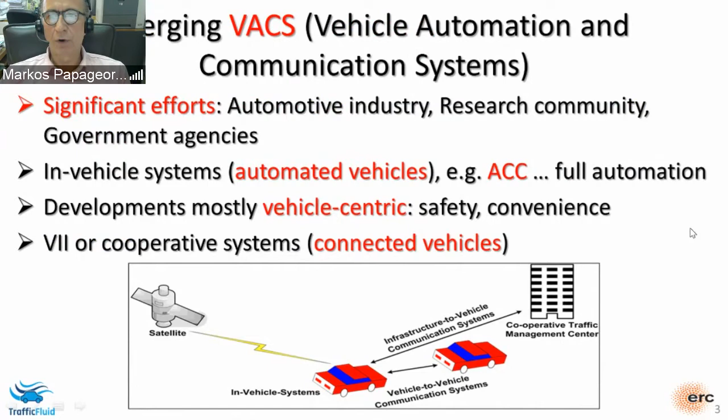And a step further is, of course, when vehicles can talk to each other and to the infrastructure, then we talk about connected vehicles, and this is important in order to facilitate a better behavior of vehicles, even for the traffic flow. Given these developments, it is very natural and necessary to ask what would be the implications for the traffic flow, which, as we said, is not the first concern for these developments. And even more importantly, how can we exploit such systems for better traffic flow efficiency? This is something that we considered within the first ERC Advanced Grant that we had, which was running from 2013 to 2018.

There is a website which is still active, and you can find more information about these issues there.

When we started in 2013 with TRAMAN21, there were very few groups addressing similar questions. Meanwhile, research in our domain is dominated by good works that look at issues of implications and exploitation of vehicle automation for traffic flow efficiency, addressing mixed traffic, since there will be a transient period before we possibly reach high or full automation of vehicles, with different penetration rates.

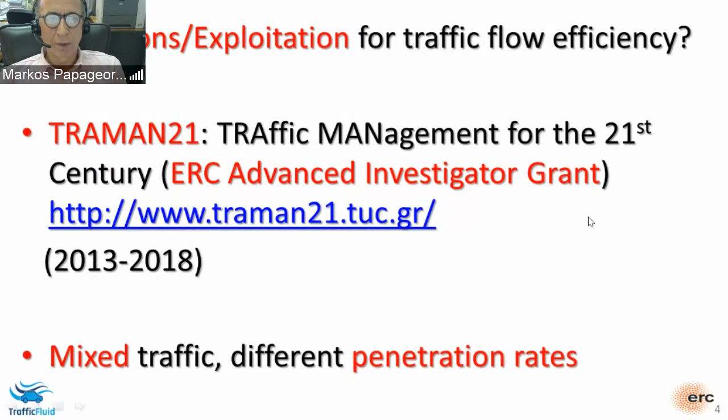Without further ado, I will enter the domain of TrafficFluid, which aims at launching and investigating the properties of a new paradigm for connected automated vehicle traffic. This means we are now looking not at the next few years, not at the transient period, but at the later period when most vehicles are highly automated, with a high level of automation. So the new paradigm we try to investigate is for that period.

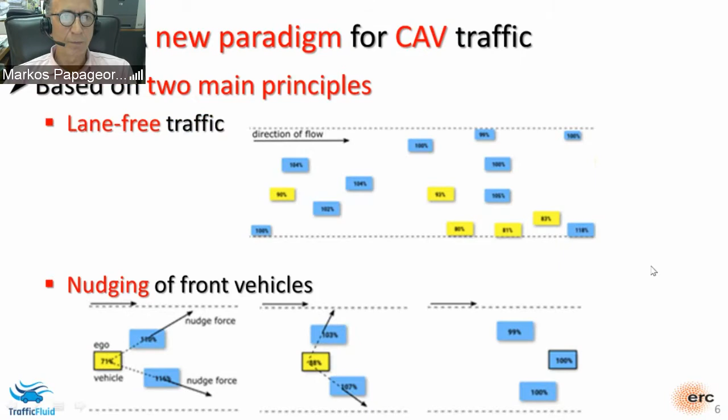So we'll first discuss those two principles in a bit more detail, first in separation and then in combination. Let's start with lane-free traffic.

I was surprised myself to find out that what we are accustomed to seeing on arterials, highways, and even urban roads—unidirectional, parallel lanes—was not there before the 1950s. There were no lanes, no parallel lanes on the road. And if you think about it, it's understandable why they were introduced.

They were introduced because they render manual driving easier. If you are driving on a lane, all you need to do as a human driver is monitor the vehicle in front of you—don't need to look left, right, or behind, just in front, and try to keep a safe distance to the front car. This is, of course, very easy and therefore very safe.

Of course, the counterpart is that you cannot stay all your life on a lane. You may need to change lanes from time to time for various reasons, and this is quite a risky maneuver. There are statistics saying that 10% of all accidents are due to lane change.

Now, the introduction of lanes comes at a certain cost. One is that lane changing leads to accidents, but there are other costs as well. Consider that highway lanes are about 3.5 meters wide, while average car width is 1.8 meters, truck width perhaps 2.5 meters. Considering this, and the fact that vehicles usually do not assign themselves optimally among lanes, we end up with a lateral occupancy of around 50%, which means accordingly reduced capacity.

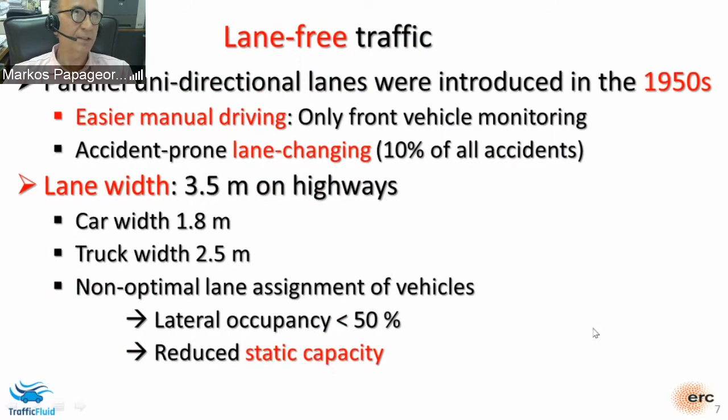But there are also losses that could be characterized as dynamic capacity losses. What is the reason for those losses? Well, we know that when a vehicle changes lane, it occupies simultaneously space on both the origin lane and the target lane. We also know that if we have traffic conditions close to critical, then just a lane change may trigger congestion, which otherwise might not appear at all or might appear later.

And last but not least, the accidents we mentioned earlier, of course, cause non-recurrent congestion, which reduces the efficiency. So, sorry. If we summarize, lanes were valuable to introduce because, of course, traffic is then safer under human driving, but it has also a cost that we mentioned.

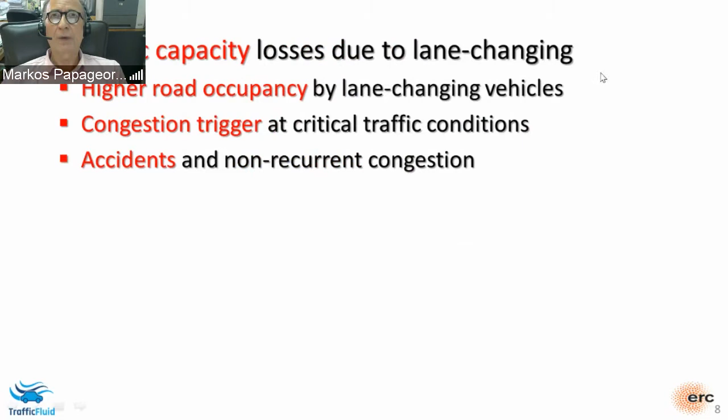So the question now is, if we go into an era where vehicles are automatic, should we stick to lane-based traffic? Should we mimic human driving? And the answer that we give, or try to investigate what happens if, is no. We don't need to stick to that. Why? Well, because we don't have human drivers, we have automated driving, we have sensing on a 360 degrees basis all around, simultaneously, reliably, and fast. So no problem with sensors.

And if we consider communications, then we can even enlarge this area of monitoring. And on the top of that, we have a closed loop system for car driving, which is very fast and efficient because it is computer based. So all in all, we have a system that is much superior to human drivers in terms of senses, in terms of real-time information, and in terms of decision making. Superior because it is reliable, it is fast, and can do the job efficiently.

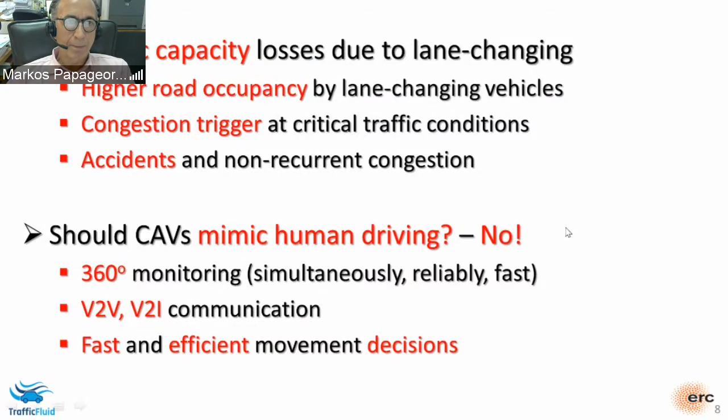And therefore, we believe in this project that if CAV would be floating, not following lanes and lane change, floating freely on a lane-free, two-dimensional road surface, this would, of course, render lane changing obsolete, because lane changing is something bad, as we have seen. So that would be obsolete, no lanes, no lane changing. But on the top of that, we think, and we are working to demonstrate that such CAV floating would be easier, would be more efficient, and would be safer.

Easier because an algorithm that drives the vehicle smoothly on the two-dimensional road surface is easier in absence of the discontinuous lateral displacements due to lane change. You can float in a smooth way. More efficient because we increase static capacity, because we mitigate dynamic capacity losses, and also for an additional reason: when you have no lanes, then any widening of the road, even if it is incremental, leads to a corresponding increase of capacity.

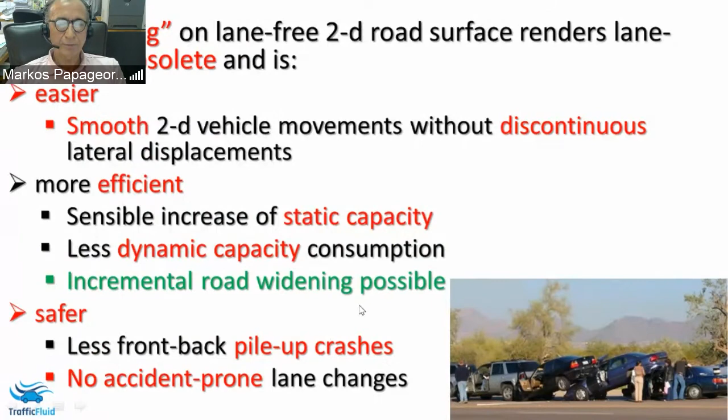Now, what about vehicle nudging? You all know that vehicular traffic flow is very similar to water flow. In fact, the celebrated LWR paper in the 50s had two parts, part 1 and part 2. Part 1 was about water flow, part 2 was about traffic flow, based on exactly the same mathematical principles. So we have kinematic waves, we have shock waves, we have the flow-density characteristic. They are not the same, of course, in shape, but the principles are the same.

However, there is a big difference. And this is because conventional traffic is anisotropic. And this feature stems from the fact that drivers are influenced only by front vehicles. You drive according to your front vehicle. You're not influenced normally by what the vehicle behind you is doing. And this is leading to an anisotropic behavior of the traffic flow at the macroscopic level.

And this is, of course, not the case with water particles, because water particles are pushing front particles. And this increases the capacity of water. So with water, if you have higher queuing, if you have congestion, you have higher flow. So the fact that vehicles behind may influence vehicles in front has implications for the emerging macroscopic flow behavior. And in particular, there are good indications that it improves capacity or flow at different densities and stability of the emerging traffic flow. Less stop and go.

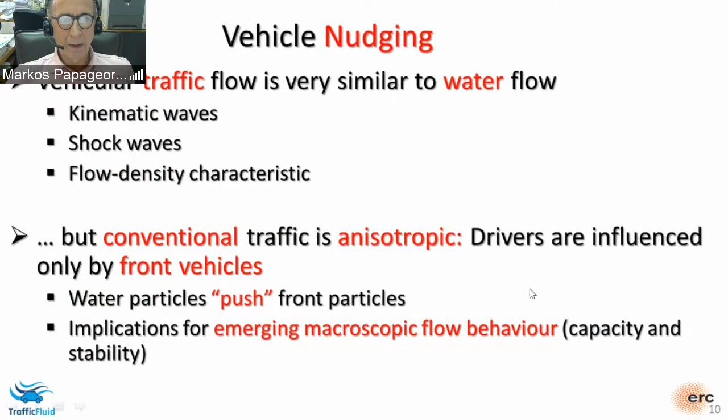So, in the case of CAV traffic, if we want, we can have vehicles being influenced by vehicles behind them. And this is, in fact, what nudging is. Vehicles behind influence the vehicles in front. Of course, this nudging should have limits. For example, we don't want to frighten passengers in the front cars, and also we don't want to jeopardize safety.

But there is absolutely no reason why we should ban this behavior and go with a strict anisotropy restriction. Because such a restriction seems to be a fossil from the era of manual driving. In manual driving, there is no other way, but in automated driving, we can do different things if it is beneficial. So why should we say, no, no, no, we want to go like human drivers?

And so with these two principles, we can talk about traffic as an artificial fluid in the following sense. What are we doing in our committee, TFTC committee, usually? What is our business? Our business is to model traffic flow, microscopically, macroscopically, model a physical phenomenon. But think about it, in the era of automated vehicles moving according to our control strategy, we can design the traffic flow characteristics that emerge from this vehicle movement. And we can design it in an optimal way.

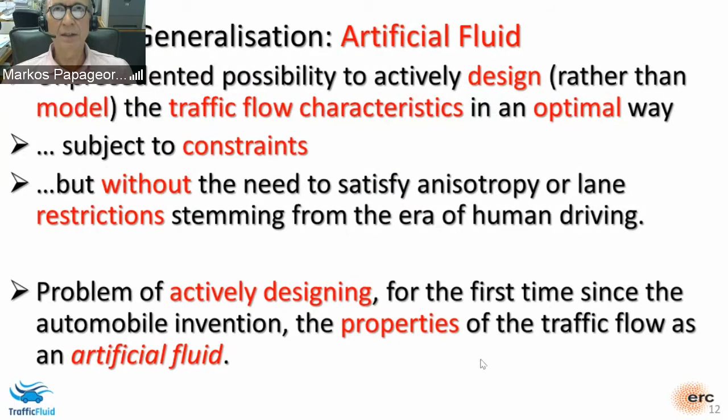Of course, subject to constraints, but without the need to satisfy constraints that appear arbitrary, like anisotropy or lane restrictions, which stem from the era of human driving. So we have the problem of actively designing, for the first time since the automobile invention, the properties of the traffic flow. And so in that sense, we can talk about an artificial fluid, because if we design the properties of the fluid within limits and restrictions, but we design it, then it is an artificial fluid.

What are the research needs? Within our project, we have 3 axes of developments, but there may be more, and there may be more even within each axis than we have thought about. So the most important one is the first one. We need to design strategies for vehicles moving on a lane-free road with the possibility of nudging. And as I said earlier, it may be easier than with lane-based traffic, mainly because of the lane changing, but it is not an easy thing.

We are working in parallel on 4 different methodological approaches for this endeavor. And there are many interesting questions arising regarding the architecture, regarding the kind of infrastructure, regarding special vehicles, and so on. So this is the first axis of work.

The second is the emerging macroscopic model. Here I do talk about a model, because on the micro level, there is no model. There is a movement strategy, an active movement, a control strategy for the vehicle. But the emerging behavior is a model. What is the implication of this or that movement strategy on the traffic flow behavior and characteristics? And of course, we need here an interplay. We need to go back and forth between vehicle movement strategy and emerging, resulting macroscopic behavior to see what is beneficial at the level of traffic flow.

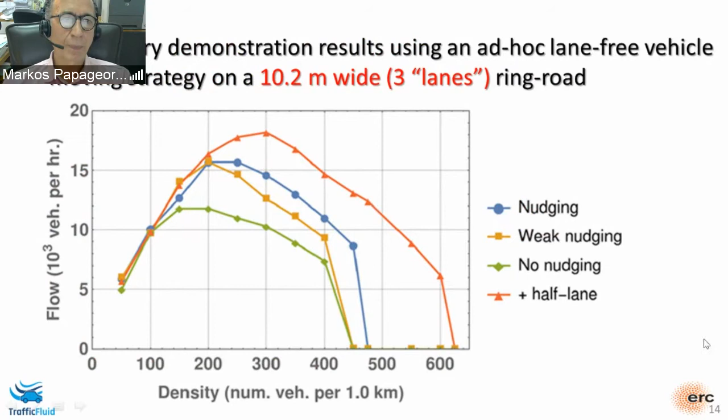And what is the red curve? Well, the red curve is a fundamental diagram resulting if you increase the width of the ring road by 1.7 meters, which is, let's say, half a lane. Of course, in lane-based traffic, if you would increase by half a lane, you wouldn't reach any higher flow. But in lane-free traffic, by doing that at the same density, you increase spaces, you increase speed, and so you increase flow, particularly for overcritical conditions. So we see that an incremental half-lane increase of width leads to a corresponding increase of capacity and of flows for the congested area.

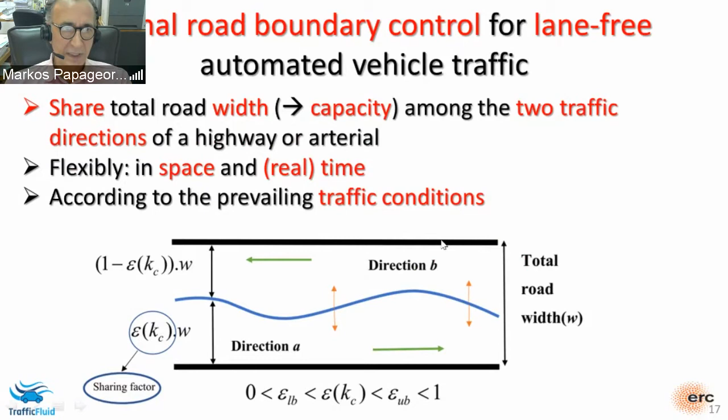So we define a factor epsilon, we call it the sharing factor, which changes over time and over space. This sharing factor is between 0 and 1, or between other positive bounds, because we don't want to utterly close any of the two directions. And this sharing factor is a portion of the width, namely the portion that is assigned to direction A, and the complement is assigned to direction B. And this has a corresponding impact on flows and capacity.

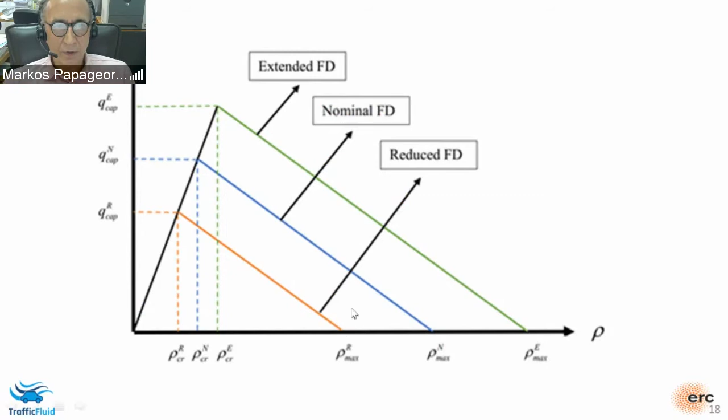Is this new? Is this idea new? No. I mean, at least the basics of the idea is not new. We all know that even in lane-based traffic, we have what we call reversal lane control or tidal flow in Europe. And this is present even with conventional vehicle traffic, but in the vast majority of cases, this is for steady operation, not real-time operation.

And for long stretches of a highway or an arterial, not different locations. So for holiday traffic, for evacuation situations, for work zones, we know that it is a pretty typical operation, but without changes in space and time. There are very few, really extremely few systems that operate indeed in real time. But of course, this has an overhead, it has a cost, because usually you may wish to have the shared lane emptied in one direction before you can open it in the other direction, and this has a strong overhead, which can be still beneficial, but it's a different thing.

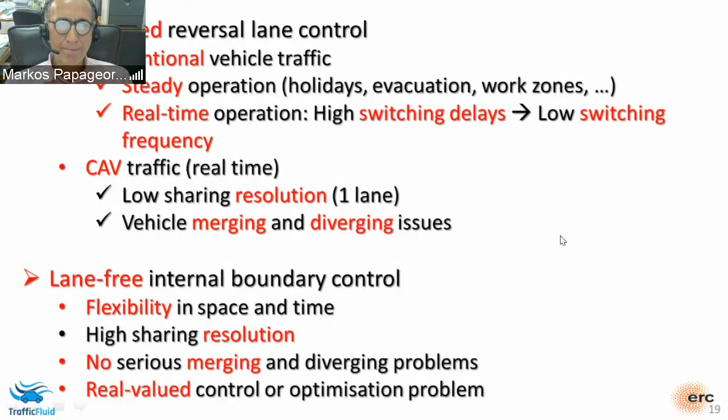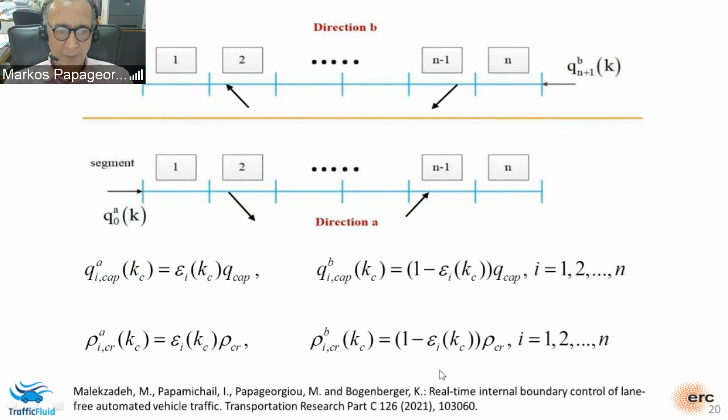And this sharing factor, which is a sharing factor of width, is at the same time a sharing factor of the total capacity, total meaning cross-road. So the direction A capacity is the sharing factor times the total capacity, and the complement for direction B, and by the way, same for densities, critical density. And this approach has been presented in a recently published paper in Transportation Research Part C.

So, to test the idea, we don't go immediately to microscopic simulation, we use macroscopic simulation, specifically the cell transmission model, for controller design and simulation testing. And we have two control approaches. One is based on a convex quadratic programming optimization formulation. And the second is based on reactive feedback control using a linear quadratic regulator.

And the performance criterion is to minimize the total time spent by vehicles in both directions. So we want to maximize the efficiency of the whole road. But we also would like to have smooth space-time behavior of sharing factors. And we also would like to balance capacity reserves, if there are capacity reserves, between the two traffic directions.

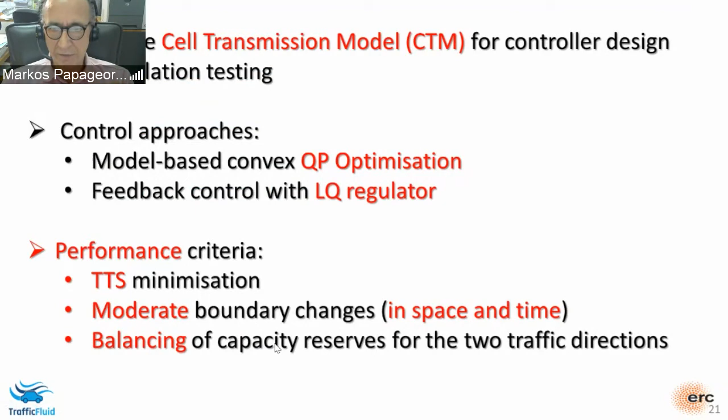So here is a demonstration example. Assume that this stretch of road is 3 kilometers, and you have 6 sections of 500 meters each, and you have off-ramps, on-ramps, and you have a total capacity of 12,000 vehicles per hour, and a control time step of 1 minute. So every 1 minute you can decide on how to move the internal boundary of every section.

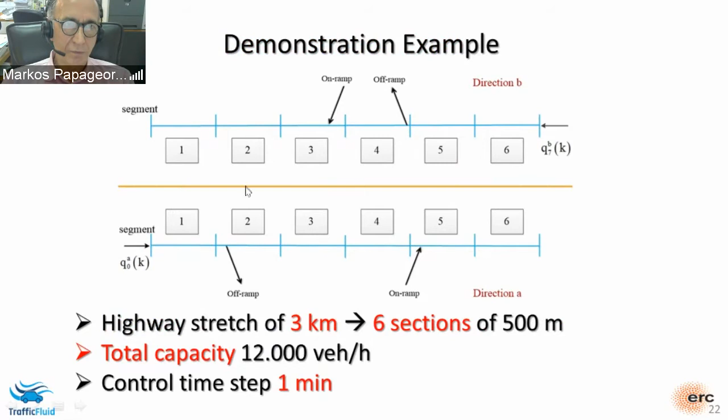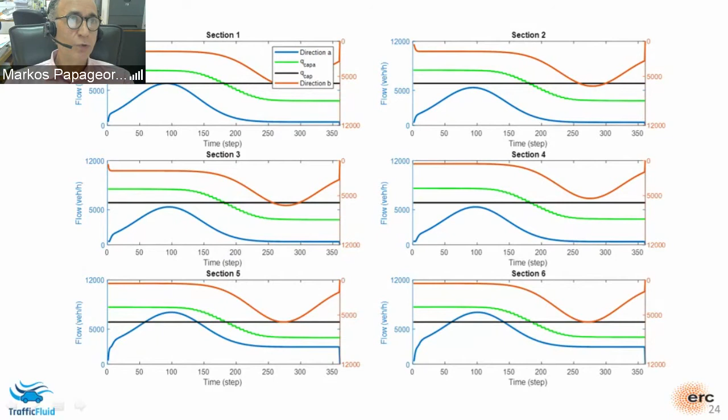And this is a very interesting slide. Looks complicated, but I will try to explain, to understand what the method can or cannot do. So what do we see? We see 6 diagrams for the 6 sections, 1, 2, 3, 4, 5, 6. And in every diagram, we have the 1 hour of simulation, so here we have time, and the y-axis is flow, from 0 to 12,000. 12,000, I recall, is the capacity of the total road.

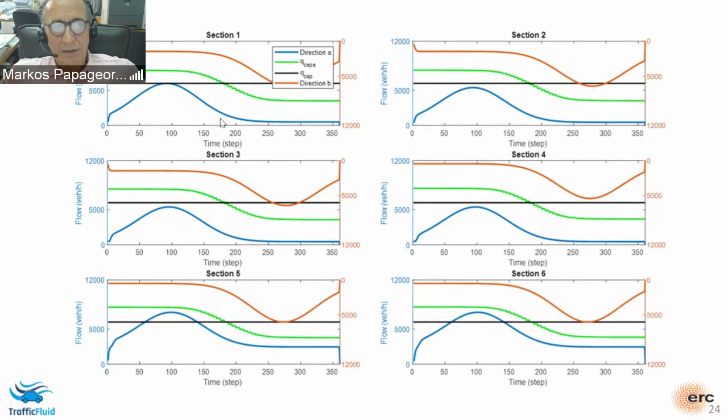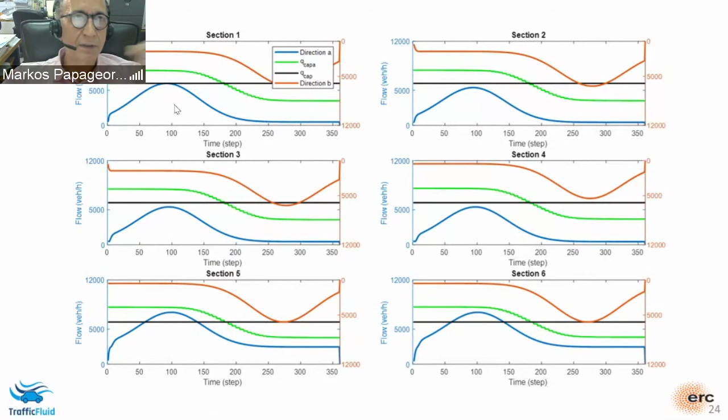So what is the blue curve? It's a flow in direction A, and it is what we call the projected demand. It is the flow that you would see over time in direction A if there would be no capacity constraints. If everybody would drive at free speed, then according to the demand scenario, this is what you would see in section 1, 2, 3, 4, etc.

And the red curve here is the same thing for direction B, but upside down. So 0 for the red curve is here, and 12,000 is here. And other than that, the time is the same. This is the projected demand for direction B. And these peaks here are due to the peaks that we had in the demand, right?

Okay, now, the black line is at 6,000 vehicles per hour. So if you would have a fixed boundary, that would be the capacity for direction A and for direction B. And this means that if we look here at section 5, where the on-ramp is located in direction A, you see that the projected demand curve crosses the fixed capacity. So we expect at this point in time in section 5 to see a congestion if we simulate things, because the total demand is higher than the capacity.

And by the same token, we would expect in section 3 later on to see a congestion in direction B, because the projected demand in this section, which includes the on-ramp, crosses the fixed boundary. But at the same time, we see something very interesting. We see that there is a huge space between the red and the blue curves in every section. Every section, there is a big space.

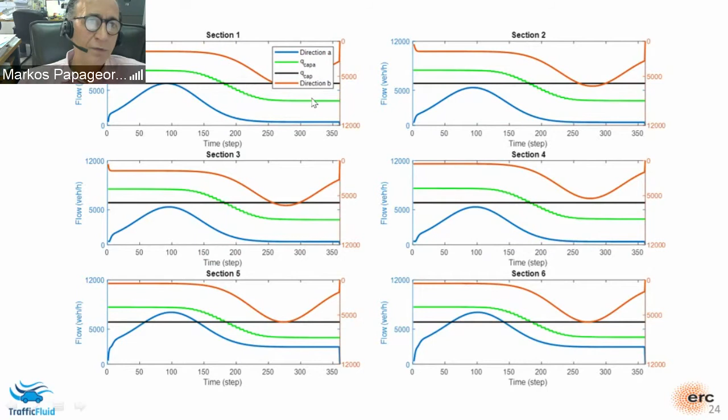So if we would be able to move the internal boundary, like in this green curve, we would never have any crossing. So we would have assigned more capacity to direction A when it has its peak, and then switch to the other direction when direction B has its peak. And so we would have no congestion at all, because there is no crossing of projected demands and capacity. And this is exactly what internal boundary control is trying to do.

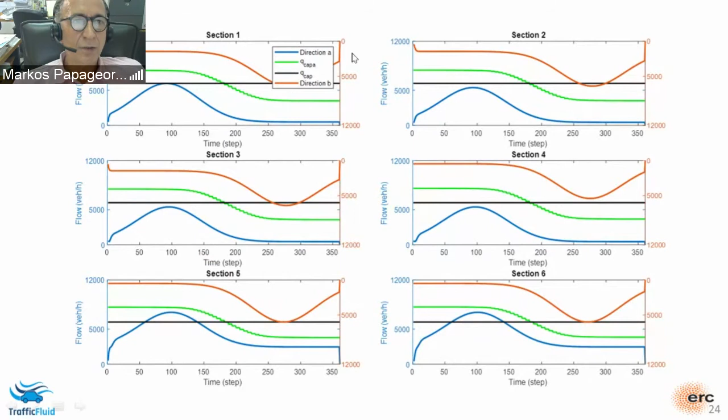So here are the simulation results for the no control case. 1 hour of time, space, 6 sections, flow from 1 to 6 for direction A, and for direction B, it goes the other way around. And what do we see here? Is it the density? No, it's not the density. It is the relative density. What is the relative density?

Well, looking at density like in conventional traffic makes sense if the critical density is constant. Then we can set the colors according to the critical density, and if it is higher, we can have it red for congestion and so on. But here, the critical density is changing over time, not in the no control case here, but in the next diagram where we will have control. So the point is not how much is the density, vehicles per kilometer. The point is how much is the relative density compared to the critical density.

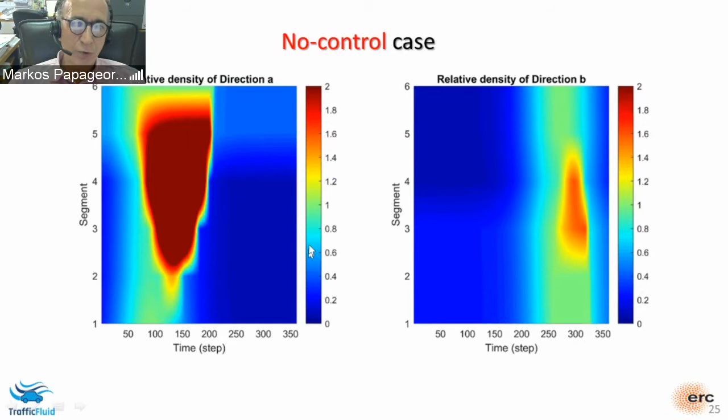So a relative density of 1 and below means no congestion. Above 1, there is congestion. So we see here congestion in section 5, as we had predicted, and also congestion here in section 3, direction B, as we had predicted. And again, as we had predicted, in the control case, no congestion. All values are clearly lower than 1, because we have placed the boundary such that there is no crossing, no exceeding of capacity.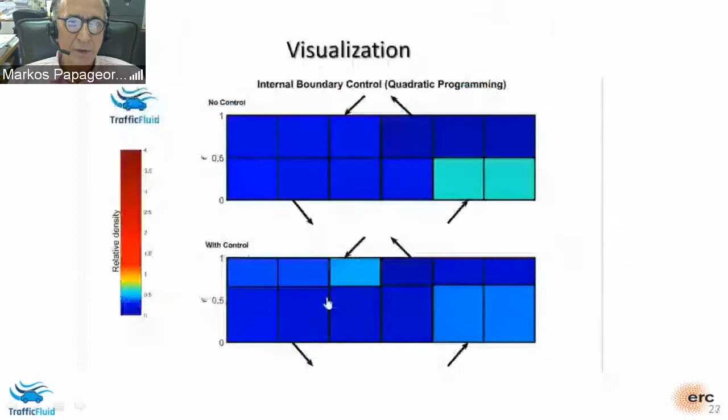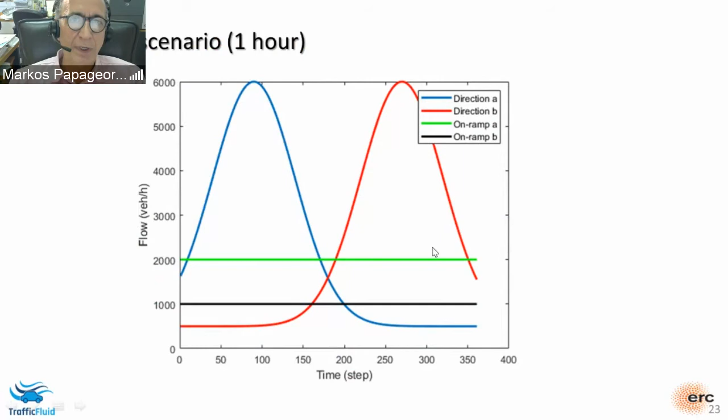Now I ask the question: is it always possible to avoid congestion? And the answer is, of course, no. This is a different scenario here, where we have moved the two peaks closer to each other.

Everything is the same, but we moved the two peaks closer so that we have a stronger overlapping of the peak period. In this case, if we look at the curves, we see in some sections a big space between the two demands. But look at section 5 - the two projected demands are intersecting, are crossing. So there is no way to find a location for the internal boundary to avoid congestion. In this case, congestion is unavoidable even with internal boundary. But of course, it would be very strongly mitigated.

And what is also interesting, this is now a bottleneck. Section 5 is a bottleneck because the total capacity is not sufficient to accommodate the total demand. But in contrast to conventional traffic, where a bottleneck is independent - it can be in A direction, it can be in B direction, there is nothing in common - the bottlenecks are independent of the other direction. In this case, the bottleneck, if there is one, it is a bottleneck for both directions. It is not just for one direction, because otherwise you could increase the capacity and avoid it. When there is a bottleneck like here, it's for both.

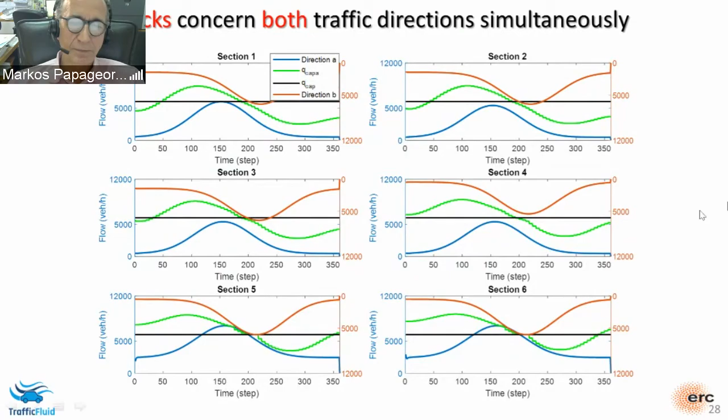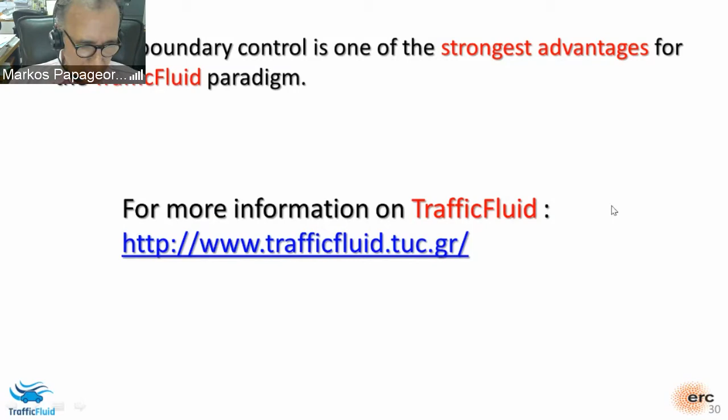So I also added the internal boundary control issue because it was one of the first issues that we addressed and considered, at least at a macroscopic level. And I believe that this could be one of the strongest advantages for the TrafficFluid paradigm. And if you are curious or interested in receiving more information, here is the website of TrafficFluid. And that's the end of my presentation.